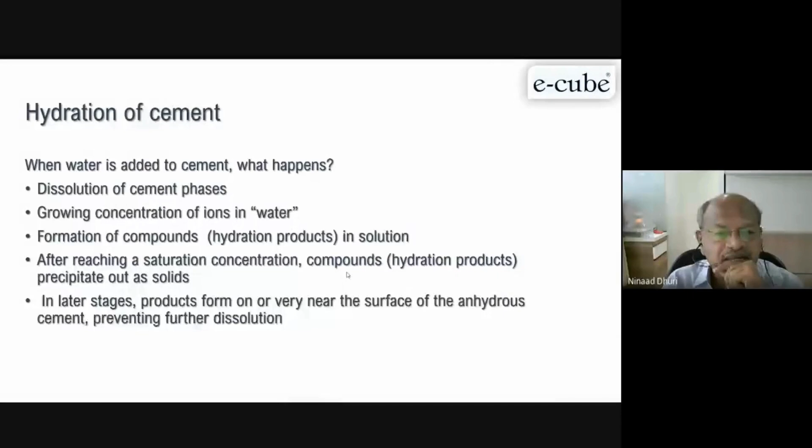So hydration, I think we have discussed this. Formation of compound hydration products. After reaching saturation concentration, compound hydration products precipitate out as solids. In the later stage, the products form very near the surface of the anhydrous cement paste and prevent further dissolution.

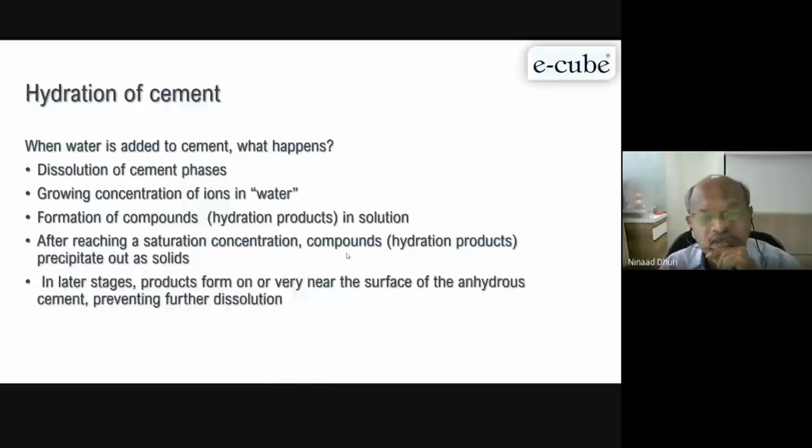Now, this is very important because some of the particles may not reach your water. So even after 10 years, 20 years, if you see the concrete, a few particles are not hydrated at all. So 100% hydration is not possible with this cement because in the mixing process, which we'll come to, some of the particles remain dry where the water may not reach. So when water is not reaching, the particle remains unhydrated. So 100% hydration may not be possible.

If you go in detail and see under a microscope, you will understand, because we have studied in ACC the concrete strength development up to 10 years. And after 10 years, it was found that some of the cement has not yet hydrated 100%. Mainly they reach the level of 90 to 95%. So 5% unhydrated particles are available even after 10 years.

So for gaining of concrete strength as per our requirement, as you have heard in the literature or as per the site requirements, we are stopping at 28 days. Once the 28 days strength is over, we are happy. But hydration doesn't stop at that level. Hydration is a continuous process. As I said, it may go 10 years, 20 years, 30 years, gaining strength.

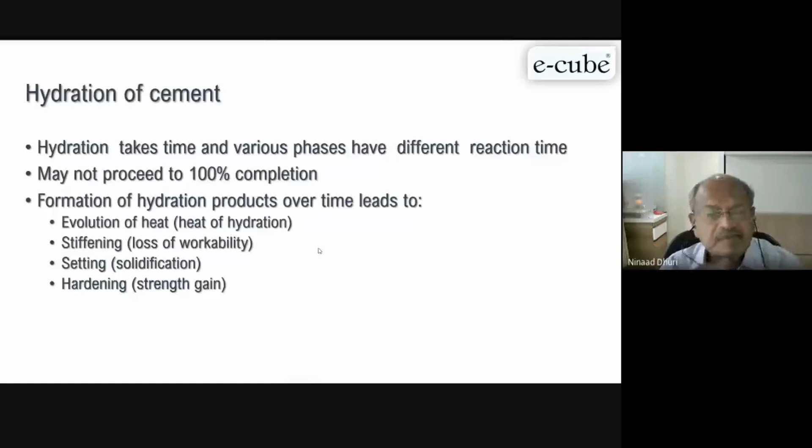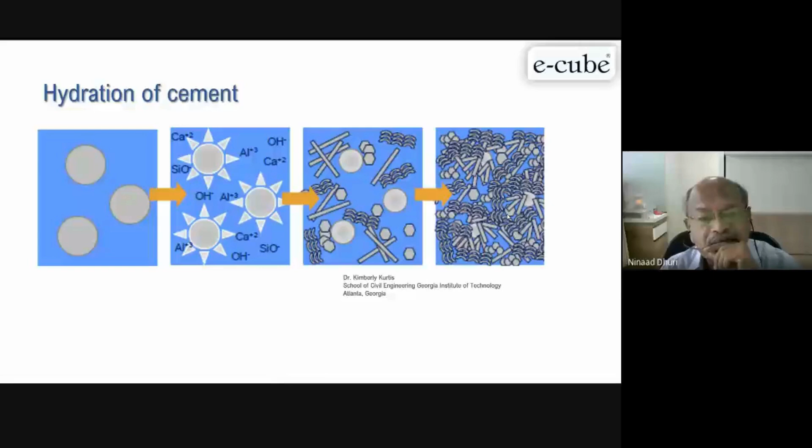Now for normal concrete it may not be possible, but when you go for high performance concrete, it is very necessary to understand how they are reacting with the cement paste and aggregate bond, their transition zone, how they are transferring the stress between aggregate to paste. That needs to be understood very carefully when you are working for a high performance concrete or having a more durable concrete. So our aim in making a concrete is to make the paste very, very dense, as dense as possible.

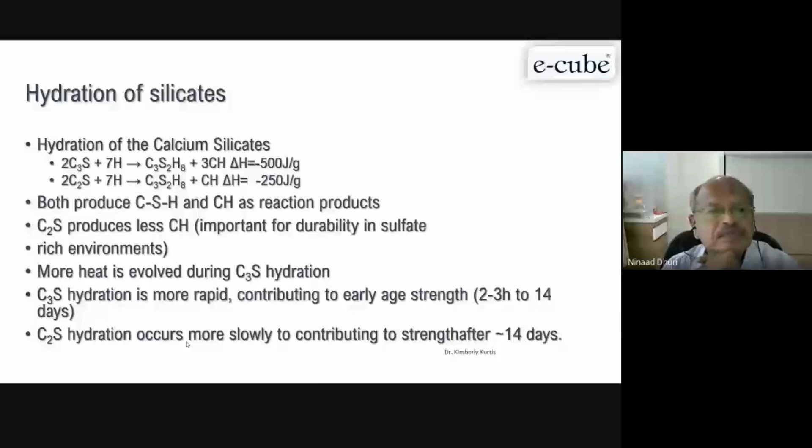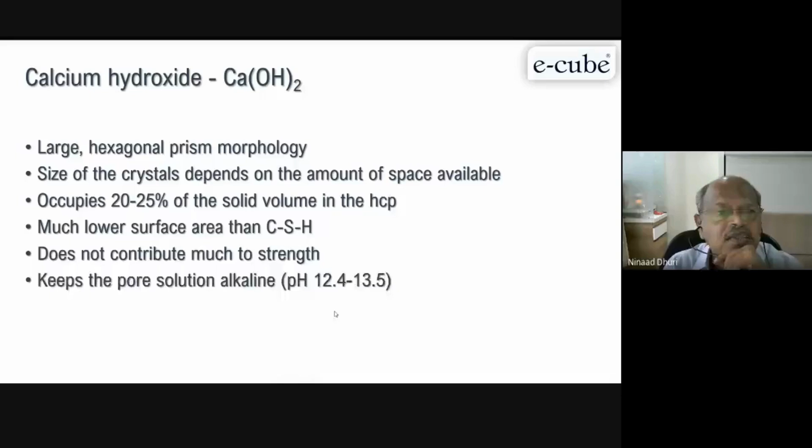So in the cement paste also there are voids, because if you see the cement hydration, we need only 20 to 25% water. Water cement ratio 0.2 to 0.25 is sufficient for hydration of the paste. But normally we work at water cement ratio more than 0.25. Now at certain levels we are working at 0.2 also, 0.15 also. But for general concrete, say M30, M40, we work at 0.4 or 0.45 water cement ratio. Now for hydration you need 0.25 and you are working at 0.5 water cement ratio, and you are able to achieve the strengths.

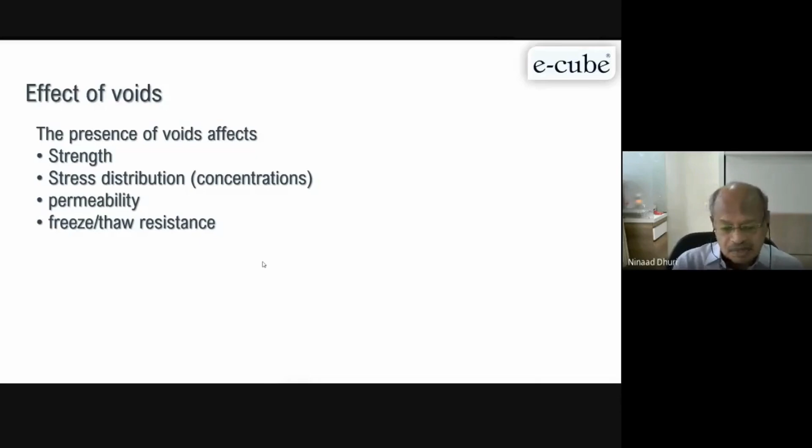Now, if you see the physical properties of the cement, which are mandatory as per IS code. In a subsequent slide, we'll see what the IS codes are. So physical properties of the cement, which are also required for designing the concrete: specific gravity of the material, meaning the cement. What is the fineness? Now fineness is how fine it is, or how coarse it is.

Coarser material takes more time to react. Fine material will get less time for reaction. Then consistency. Consistency is nothing but the particular cement, having particular fineness and particular composition, requires a certain amount of water to make a paste as a standard paste.

IS 4031 has specified how much water is to be used in making cement strength mortar. When you are testing cement in mortar, a standard is available. So we have to use that standard. Then we have to find out the setting time.

Setting time is the setting time of cement paste in standard environmental conditions. Standard in the sense, temperature is given as 27 plus minus 2, relative humidity around 65%. In that condition, if you do the testing with the formula of consistency, you can find out initial setting time and also final setting time. And that is also specified. I'll show you what the requirement is as per Indian standard.

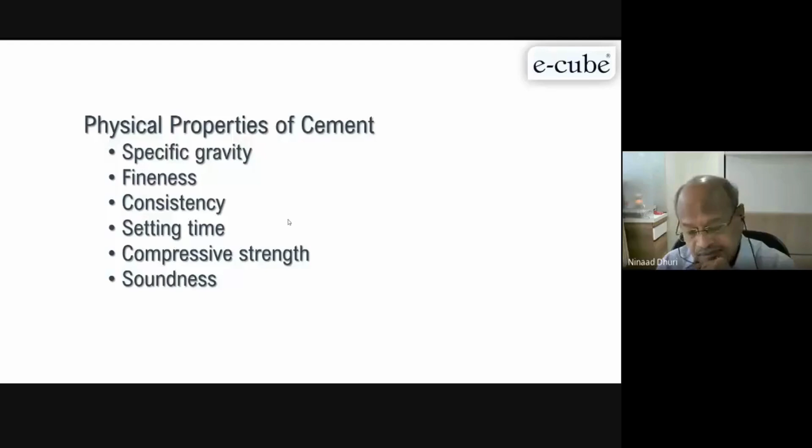And all civil engineers, you must have a copy of these codes. Whatever I am discussing, you must note down the IS codes and at least go through these codes, because codes are designed for civil engineering purposes. So a lot of interpretation and results are available. When you are stuck somewhere, you must go through these codes to have a better understanding of the quality of cement.

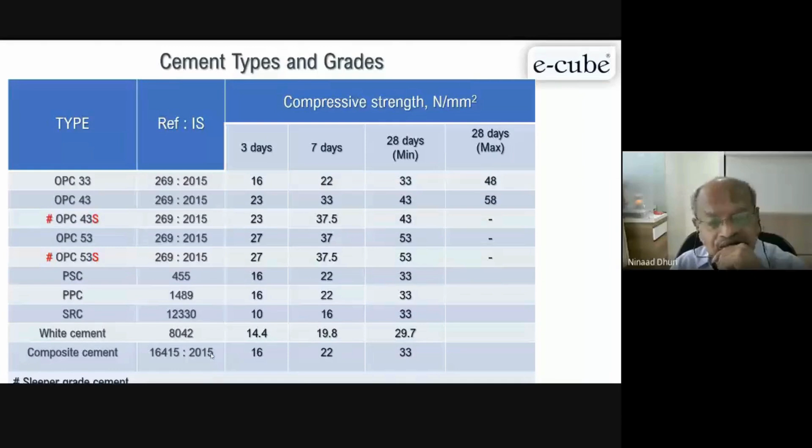Then a new cement has been introduced now in the market, IS 16415: 2015. These are all revisions, but this is a newly introduced cement. This is basically a combination of OPC, fly ash, and GGBS. This is a triple blend cement. That's why it is called composite cement. As we know, triple blend is very good for durability of concrete structures. And for small sites where batching facilities are not possible, it is very difficult to make the concrete at site. But still I want a durable structure.

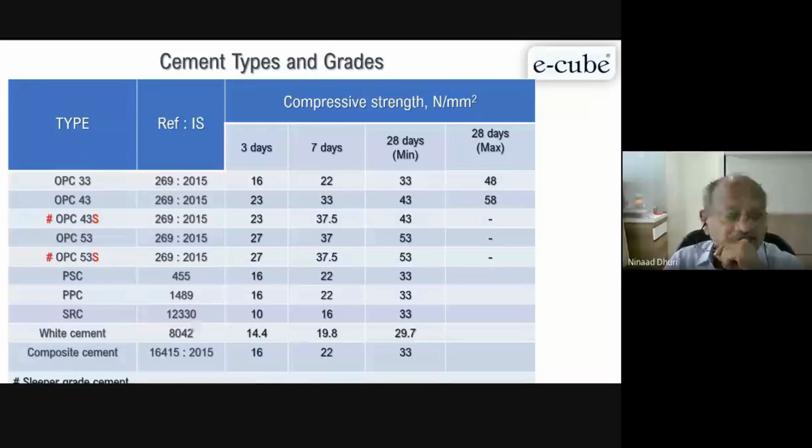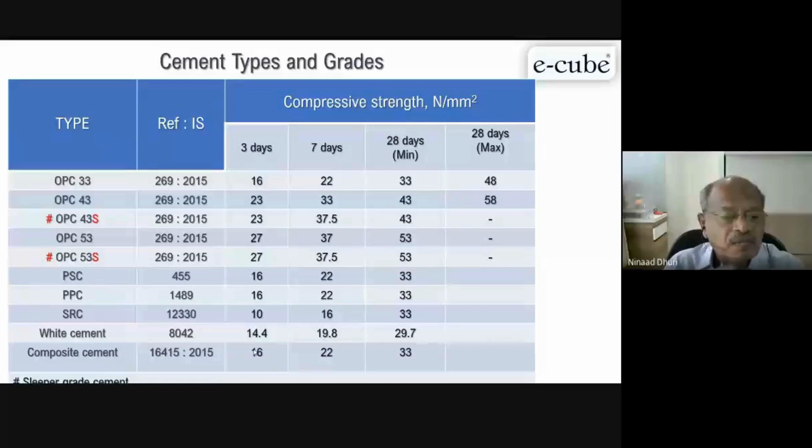Suppose I have to build my own bungalow where I have to make concrete, maybe M20, M25, M30, and I have to use OPC, fly ash, and slag to have a very durable concrete. Then it is very difficult for batching, because we don't have that much batching. We do volume batching. Maximum we can have weigh batching. But making concrete and blending at site is very difficult. So they have come out with one cement which can be used, a composite cement, with better properties. The strengths are not very high, but we can make very durable structures using composite cement. You can go through these specs for more details.